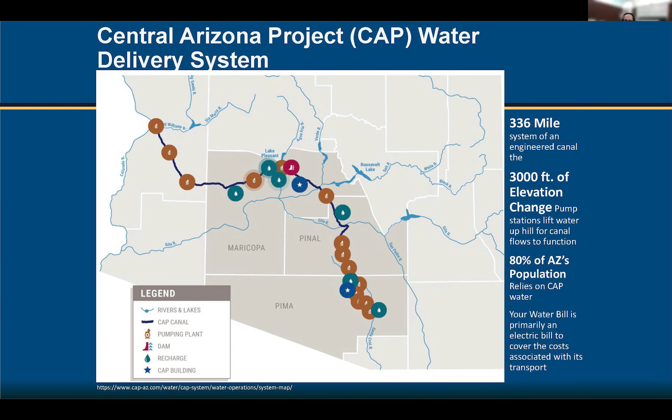Next slide, please. So high level, we know that the Central Arizona Project delivers Colorado River water to the valley and is a very important water resource for 80% of the Arizona population. SRP mainly deals with the surface water within the local riverways within Arizona, and they also are a major component in Arizona's water portfolio.

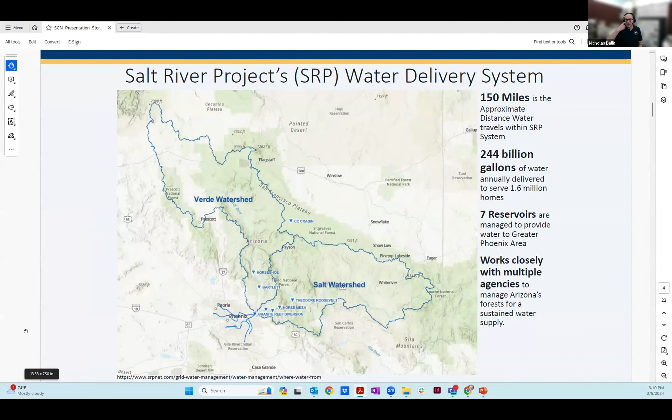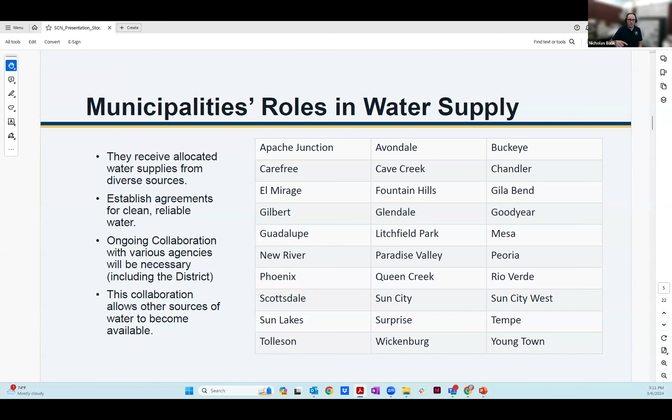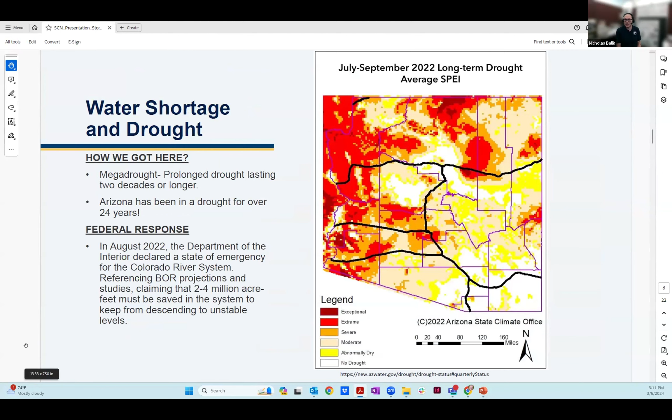Next slide, please. And then come the municipalities that also have their own diverse water portfolios where they also incorporate groundwater and other sources. And it's primarily the municipalities that deal with some of the quote unquote smaller water quantities that serve all of us wherever we live. Next slide, please. We've been in a drought now consecutively for 24 years. Next slide, please. And the allocations associated with the Colorado River water are also likely going to get less and less as time goes on. Next slide, please.

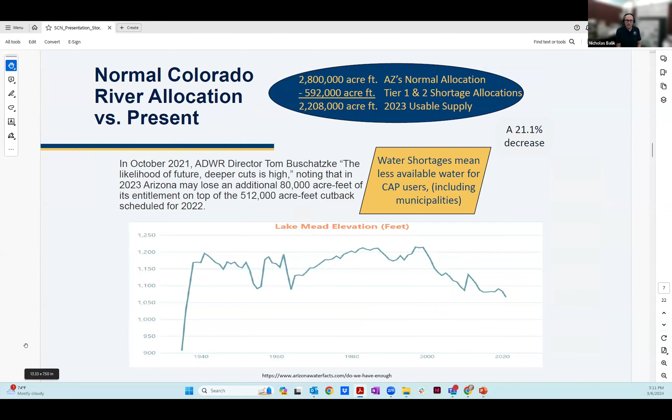So that means we need to go about resolving our various water challenges within the Arizona water portfolio and improving resiliency with different approaches. There's been a very solid effort for multiple decades, with so many leaders in Arizona championing these approaches from the 1980s all the way to the present: improvements in water efficiency, advancements in effluent reuse, small amounts of desalinization, improvements in groundwater access and establishing underground water reserves for future use, and also stormwater capture and reuse.

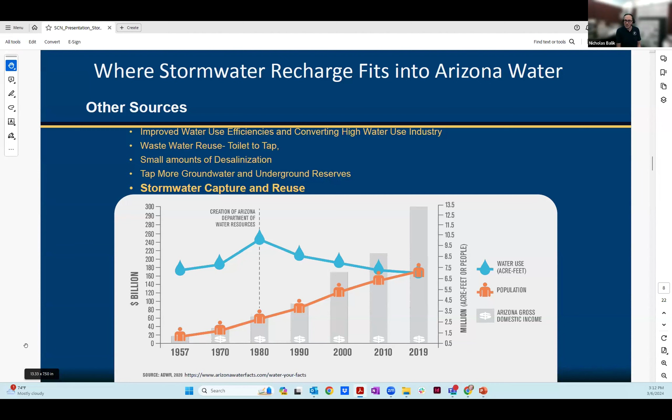This is a great image that I'm sure has been reverberated throughout multiple presentations from ADWR, and it speaks to Arizona's resiliency on water utilization. Population has gone up and the relative water use has not. However, the population is still expected to go up and there will still be increasing challenges. So creating more resilient water sources, this is where we are. On to the next slide, please.

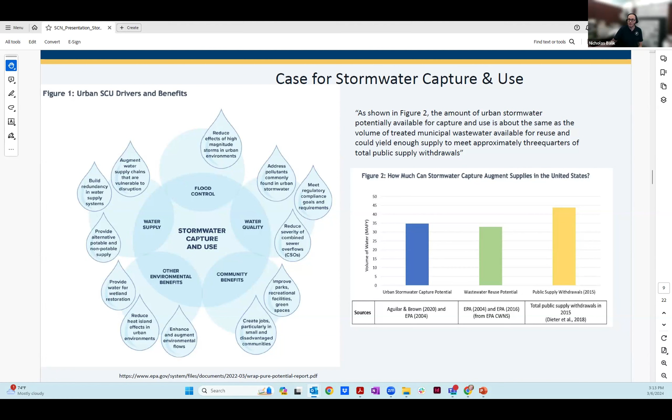There was a study done in 2022 from the EPA in conjunction with other water agencies that looked at the case for stormwater capture throughout North America. And it created this nice diagram showing the different groups associated with the idea and implementation of stormwater capture in North America. Next slide, please. So now I'm going to get into stormwater recharge as a whole.

I might say some statements here. Input is always open. Let's have deep discussions about it and finesse the various terminology and talking points on these issues. It's important to note that stormwater recharge, I've found in my time in this realm, some folks might utilize this term very loosely, and it has a lot of gravity to it, thus the great turnout of people we have on the line today. So it's important to understand what is it, how is it, what are the approaches, what is it not?

So I just want to highlight stormwater recharge has two different approaches. It's either with water credits or without water credits. And depending on that approach, it severely directs how the scope of work for those projects is implemented. If there are water credits, there will likely be more collaboration and direct involvement of municipalities that have the water rights to that water, which might leave some wiggle room for higher amounts of litigation. And because the price is also increased, there will likely be less availability of that stormwater to be allocated towards the natural environment.

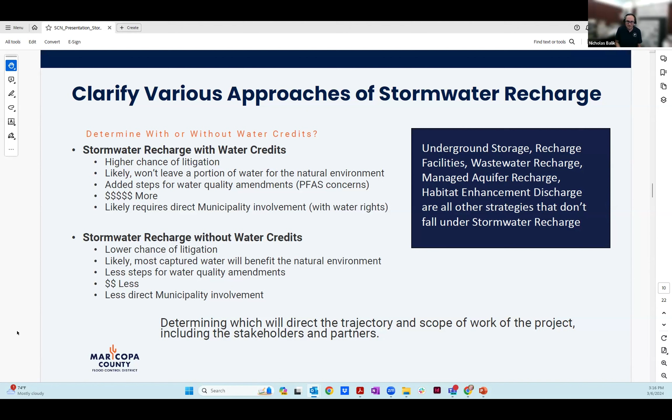So understand big water. The last concept to grasp is big water versus small water. In the stormwater recharge world, I've seen it happen either in conversation or whatnot, where we might refer to GSI LID as a quote unquote stormwater recharge method. And when you go about saying that, you might get some pushback because stormwater recharge primarily is associated with water rights. And you might have to clarify.

And it's kind of smaller. So what's the bang for the buck of the amount of project that you're doing? These are all things that stew in your head as you're trying to have these conversations. Primarily, the bigger stormwater recharge associates strategies such as spreading, recharge basins, injection wells, Flood-MAR, kind of large scale. And you'll see that these projects are roughly 1,000 plus acre feet per year, whereas the GSI strategies are significantly less than 100 acre feet per year.

And obviously, because of our audience, it's important to note that GSI does play a component in this. It is a vital tool in our toolbox that helps with infiltration and flood mitigation. So it is a tool to consider. Just keep that in mind when you're talking larger picture stormwater recharge.

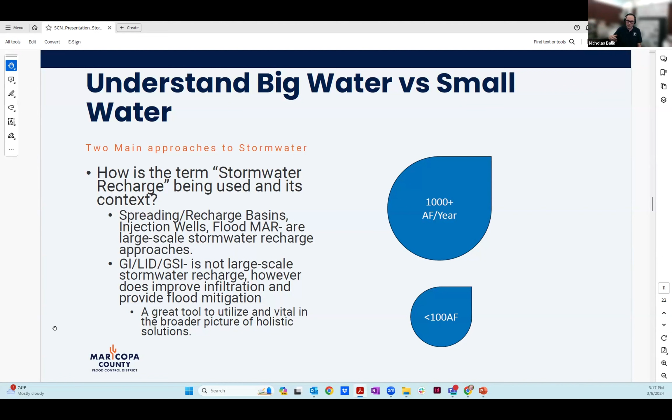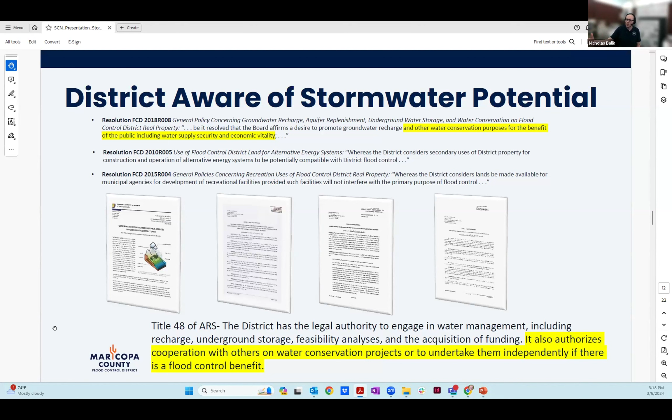Next slide, please. I want to communicate that the district is aware of stormwater potential. For multiple decades, there have been ongoing efforts dating all the way back to 1988 when the district did the very first recharge feasibility study, which was a catalyst for a lot of SRP's own recharge efforts. So we have a long history of internal documents and ongoing efforts on understanding stormwater, managing it, and finding ways to make it more relevant in its inclusion in the future.

Next slide, please. And with that, there's always ongoing studies that we're a part of, and with every passing study there's new knowledge that's gained. This is from a mildly older study from 2018, but it's definitely relevant to this conversation. The district did a study where it evaluated 8 FCD structures that the district owns, and it looked at the discharge from 4 different storm events over the course of a year. And it attempted to measure the volume of that stormwater that was being discharged.

I just want to mention, determining the volume of stormwater is a hard task, because primarily the functions of flood control look at peak volume management. And peak volume measurement is not an effective way to accurately calculate the total stormwater. It gives you a general ballpark, but you have to look at the gauges at our structures and their discharge flows. And here's another variable: many of our structures have multiple discharge locations depending on the flow rate. So all those things flow into this.

So just asterisk, in order to assess total stormwater volume that can be collected and used, further studies must be conducted where data is collected from all structures at every discharge location for numerous stormwater events. Now that asterisk is done, let's get into what this study says.

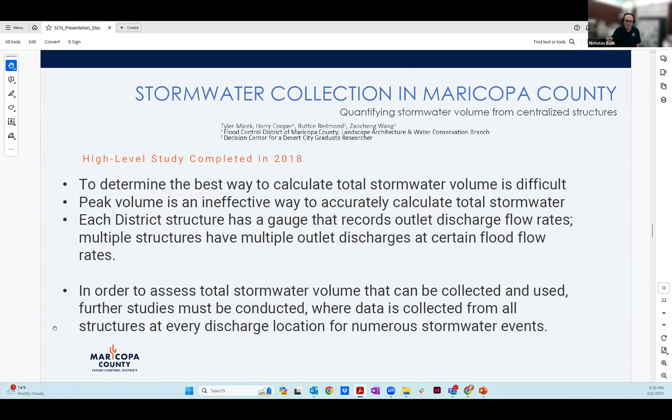Next slide, please. So what the study found, again, from 4 rain events at 8 of our 22 dams over the course of 1 year, there was over 60,000 acre feet of conveyable water that moved through that system. That's a significant amount. Many of the towns and cities' overarching annual allocated water supplies are significantly less than the 60,000 acre feet that was conveyable just from 8 structures. That's not including all the structures. Next slide, please.

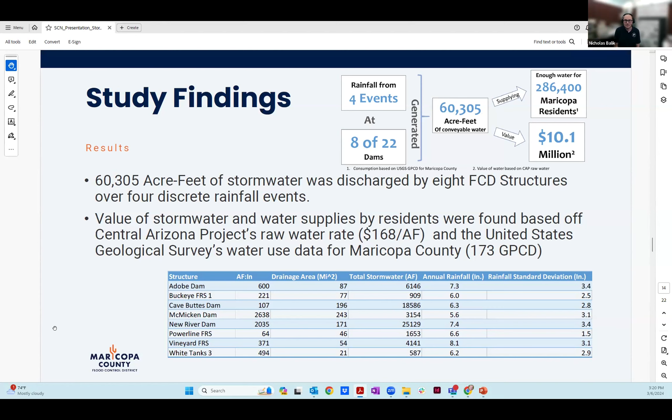So again, the district is aware of the relative potential of stormwater utilization. We can crunch the numbers and see there's definitely some significant water here. It's just a matter of figuring out the other nuances, and you have to look at what other structures and strategies have done and reflect on those. These are examples of underground storage or recharge facilities that don't actually incorporate stormwater recharge, but to the person who's not relatively familiar with these things, they might correlate these, and you might have conflicts in discussion. So it's important to be prepared and to understand the differences.

So Pima Mine Road recharge by the CAP and CAGRD, this is your traditional underground storage facility. It takes allocated water from the Colorado River and injects it into the ground for future use. You have the New River Agua Fria River Underground Storage Project by SRP. This was an example of surface water, CAP water, and effluent water combined that serves a broader swath of Avondale, Chandler, Glendale, Peoria for future use.

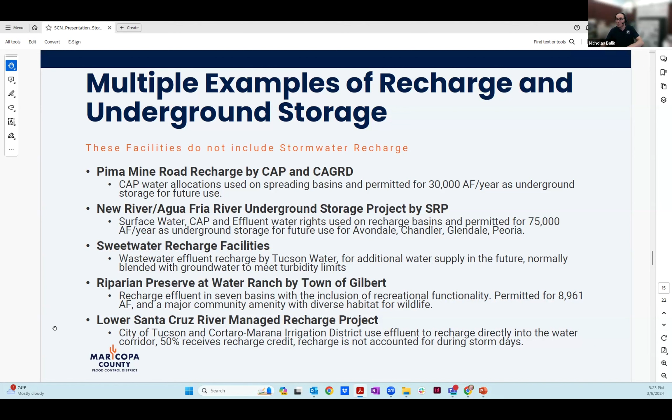And then the Riparian Preserve at Water Ranch in the town of Gilbert utilizes effluent as well, but they were able to combine the utilization of this effluent to make this recreational facility that provides phenomenal community amenities and diverse habitat for wildlife. So just these 4 or 5 that I've listed off, there's such a diverse array of how they're applied, and they're not even incorporating stormwater recharge. Next slide, please.

Here are some that are incorporating it. So what's super exciting is that we do have Eleanor on the line, and Tucson has been such a champion in so many different ways, but this is a facility that was completed, I believe, in 2007, and it was a facility designed for the purpose of flood control while also capturing stormwater, managing it, infiltrating it, thinking about it for future use and providing environmental functions.

And the main source of water for this structure, for this project, is stormwater. Now, granted, there had to be still some extra steps to make sure that Pima County Flood Control in Tucson, they had water rights associated with this to allow this to happen. But this is a phenomenal example. The KERP, I know many have already probably been to the site, and it would be wonderful to implement more of these. Next slide, please.

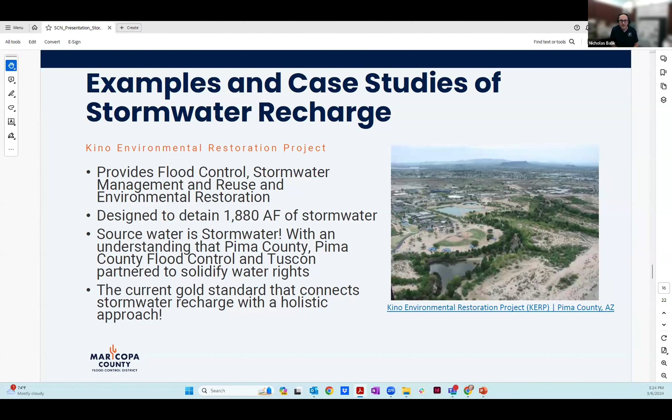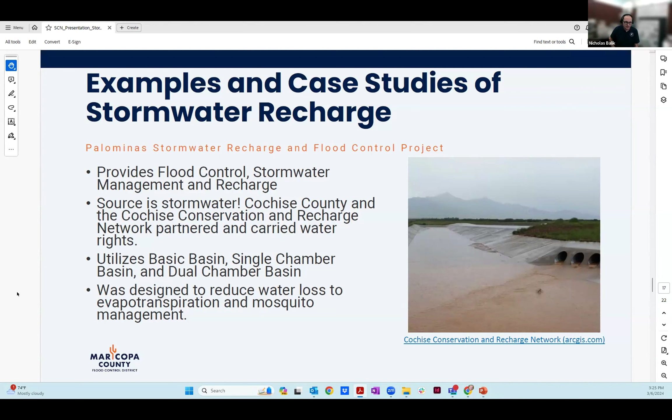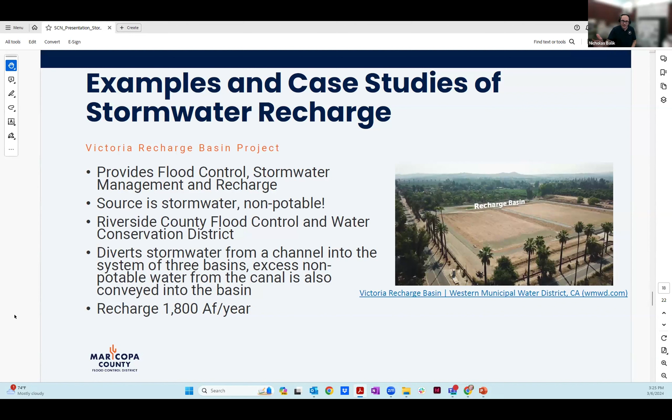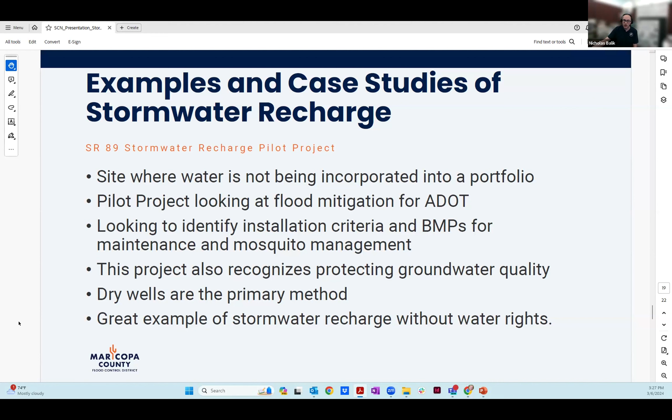And dry wells have their own nuances in their maintenance, and sometimes they might fill up with sediment and you have to take maybe extra steps in going out there, maybe redigging it. So they're going to be piloting this for now and then on to the future. And it's a great example, again, of stormwater without water rights. So this water that's infiltrated is not incorporated in the portfolio of Prescott or Prescott Valley. It's primarily a flood control function while providing the functions of ADOT on a safe traveling corridor. Next slide, please. Many agencies are already doing much of this work.

Next slide, please. So high-level conclusion, I'm getting on my little soapbox here, but I think it's important to again continue these discussions. There are many tools in our toolbox, and stormwater recharge, just be aware that what you're talking about, if you throw in recharge, it might not actually be stormwater recharge, or from an optimistic point of view, there might be potential to, in the future, incorporate that stormwater recharge within the project. But you have to understand who you're talking to, understand the context, clarify what the strategies are.

Water rights can be a scary thing. And depending on who you're talking to, recharge might be a triggering topic. But don't fear, because most of these efforts have already been done. All right, so we've already implemented this before. You can kind of take the edge off a little bit. You can provide these examples. They've been functioning for almost 2 decades now in many of these examples. Other recharge methods likely might not incorporate the stormwater recharge. So keep that in mind, understand some of the terminology that you're using.

And GSI, LID, of course they have significance, and they will continue to have significance. They do improve infiltration and they do provide flood mitigation. Will they immediately address the 100-year peak flood event? There's challenges to that, and you'll have to be able to address those challenges in those conversations. But they do have significance.